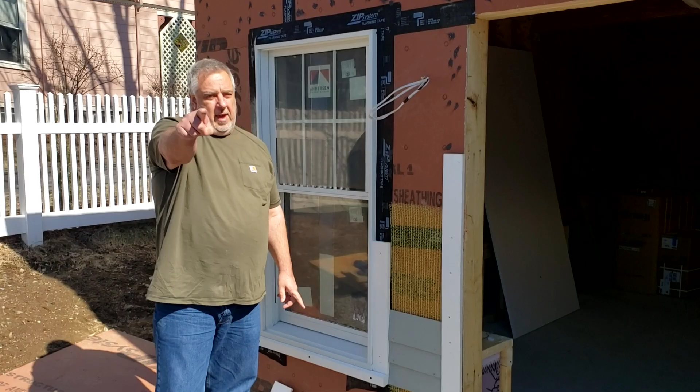We have Modern Renovations. We're doing a small garage and home gym here. With COVID, these spaces have become somewhat the norm for people, and we're doing this home gym here.

But today we're going to concentrate on this beautiful mock-up that Victor and his guys did, and we're going to talk about the rainscreen. First of all, a mock-up does a couple things. One, it shows the guys on the crew what we expect. It allows me to see what kind of work they're doing and make sure we're getting the design intent right.

But three, a lot of people don't ever use it as a tool. You bring the homeowners out here and explain to them what you're doing in the mock-up and why the building science is working. That elevates your position as a builder, that you're using science to the benefit of their project.

So you can see here, we have the Andersen windows. It's been installed, flashed. The zip wall has been properly taped. Notice that all the laps are proper laps. It's been rolled thoroughly, it even says roll the tape on there. And then we have our 1x casing, our historic sill, which is a 6/4 sill.

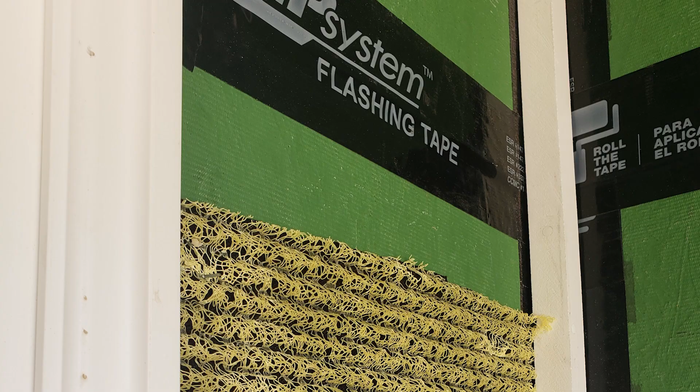We have Benjamin Obdyke's Home Slicker, which is probably a little more than a quarter of an inch. And then we have our door casing here. And again, it's a mock-up, so this will get cleaned up when we actually put the door in. And then we have our traditional lap siding happening here.

But the purpose of the rainscreen is twofold: it's to drain water, but it's also to help the wall dry. And when we get back to the studio, we're going to talk about that in depth.

But before we head over there, I just want to do a quick mock-up. I got some tools of my own.

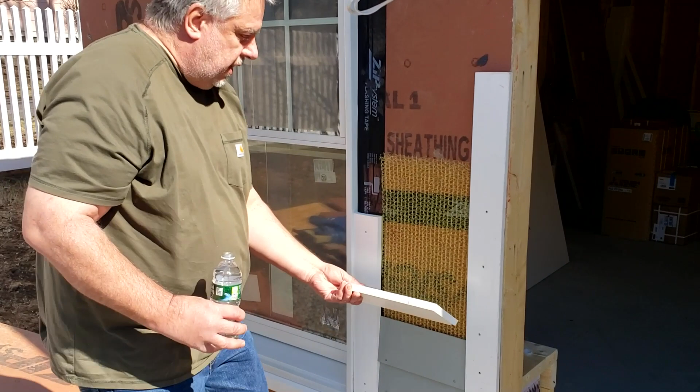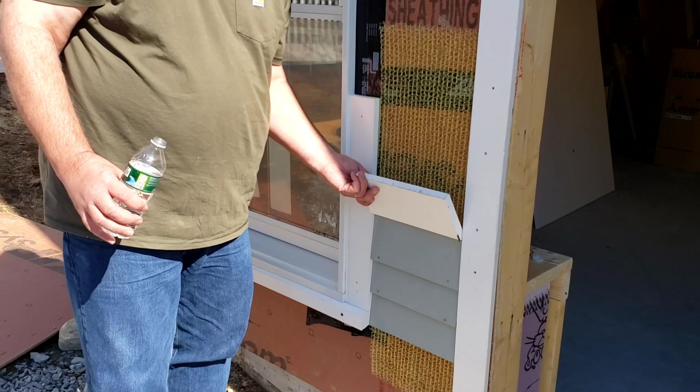So you can see here, this is just a basic funnel, but when I pour the water in, you can see at the bottom of the wall how that drains out. Really nice. So we have that draining capability happening at our wall system, and then we have that drying capacity too.

So let's head back to the studio. We'll pull up the drawing and we'll talk a little bit more about rainscreens.

Hey everybody, hopefully you enjoyed that little trip out to the job site. Victor and his crew doing a hell of a job out there, but it's always great to see rainscreens in action. As an architect, my whole life revolves around planning, and it's great to see things being executed with that mock-up and seeing things work actually as they're planned.

So anyways, got Big Red, I broke out the wall section from that project, and let's have a little bit of chat about the benefits of a rainscreen. So let's have at it.

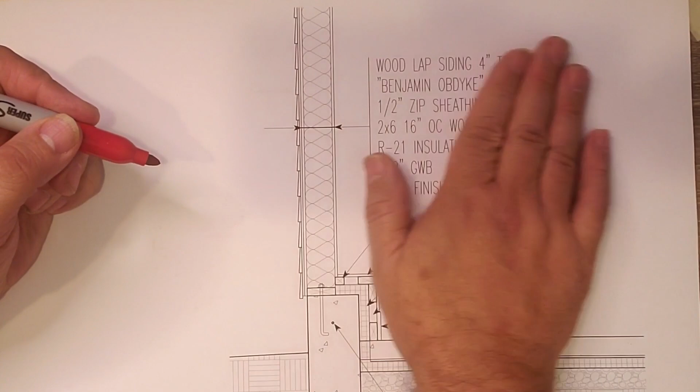All right, so there is the detail from that wall. Let's talk a little bit about rainscreens. So to give you some orientation, there is...

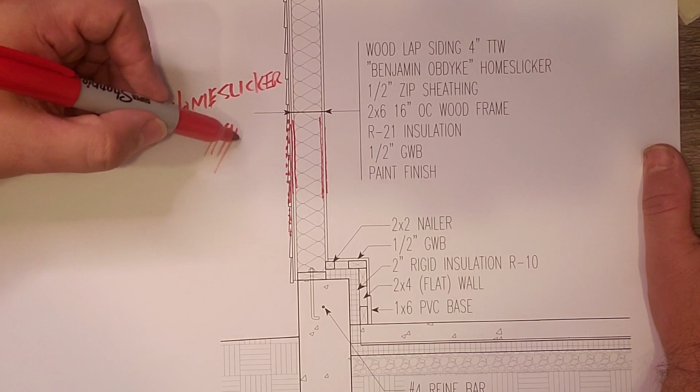...interior gypsum board that'll go on that wall. This is that exterior zip sheathing. Then we have the Benjamin Obdyke, it's called Home Slicker. It's nothing more than this plastic yellow mesh that's probably on the order of a quarter inch in thickness there. And then of course we have wood lap siding on there.

So let's talk about rainscreens. Write some of this stuff out, and I know most of you know how to spell it, but: rainscreen.

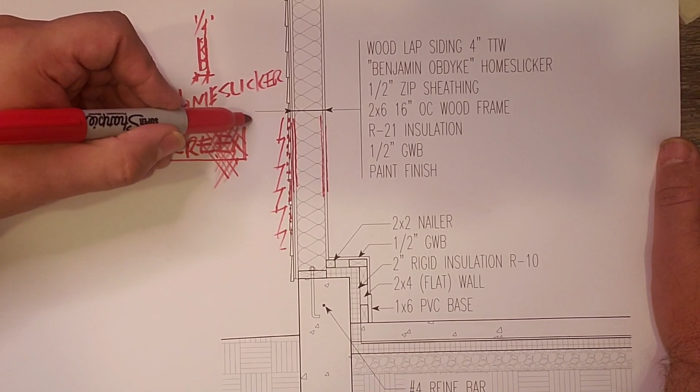In my time, I've heard them called pressure equalized rainscreens, pressure screen, all kinds of simple names. But for us, we're just going to keep it simple and call it a rainscreen.

So what does a rainscreen do? Well, it basically has two functions. Now, most people concentrate on the draining of a rainscreen, so that's job number one.

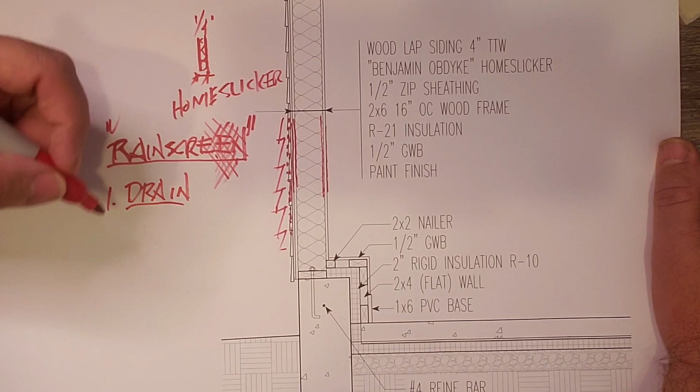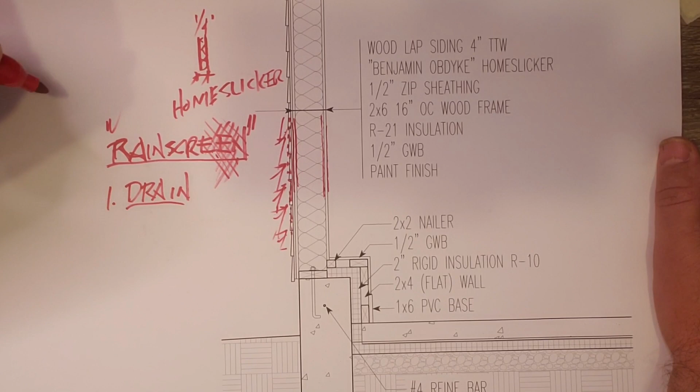And you've heard me talk about water before. So if water migrates into the system here through the joints, lap joints, gets blown in, all that good stuff, well, and it will, don't think it won't.

It will. That water needs to go, because remember, we call it water management, right? It's not water barrier, it's water management. So we have to manage the water.

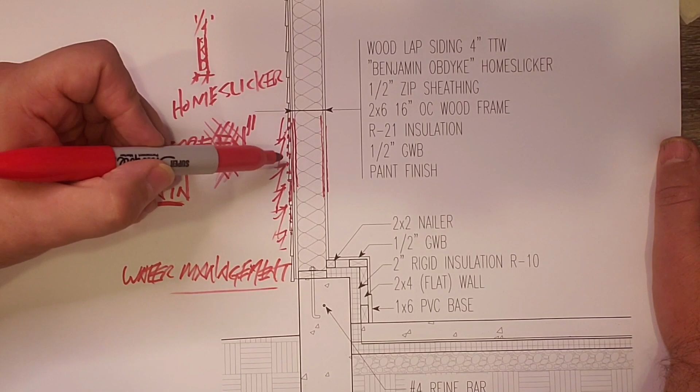So the first thing we have to do is drain that water. So any water that gets into that system has the ability to migrate via gravity, which is always a good force. Why? Because gravity's free. It's non-mechanical.

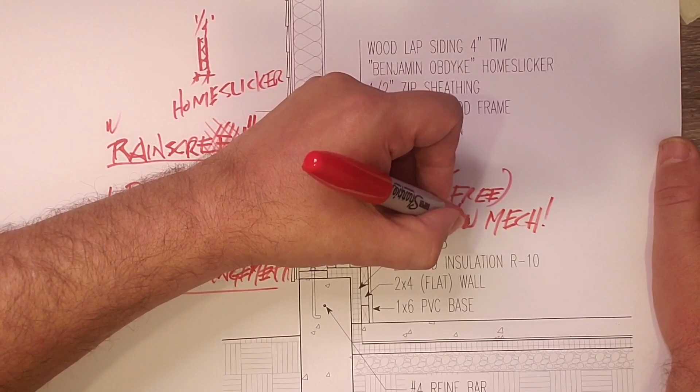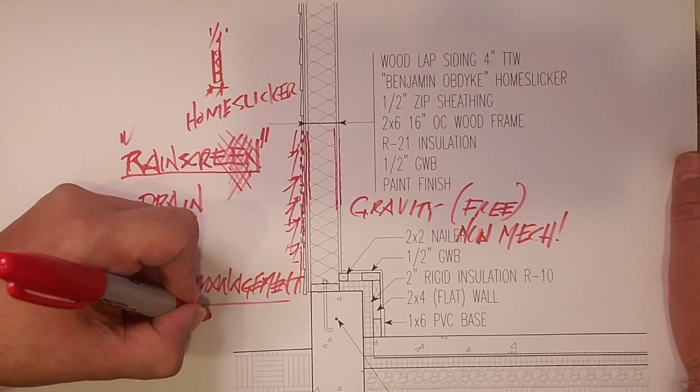Right? It just exists, so that's good. We have things in our favor. So drain it. And because it's water management, you've heard me say down and out.

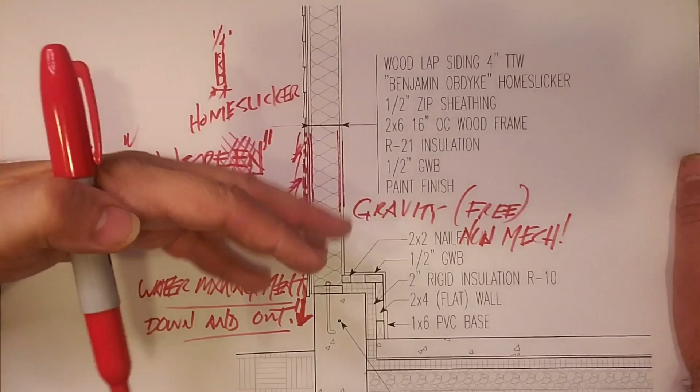And that's what we're doing. Any moisture or water that gets into the system will drain down and out. Keep in mind, you're not getting gallons and gallons of water back there, but you could potentially accumulate enough in certain areas where it could have a problem.

So the way we get rid of problems is we drain them down and out. Now, some of that moisture that gets into that system is going to migrate into the system, and it's going to get taken up by the zip and the clapboard, the lap siding, all of that stuff.

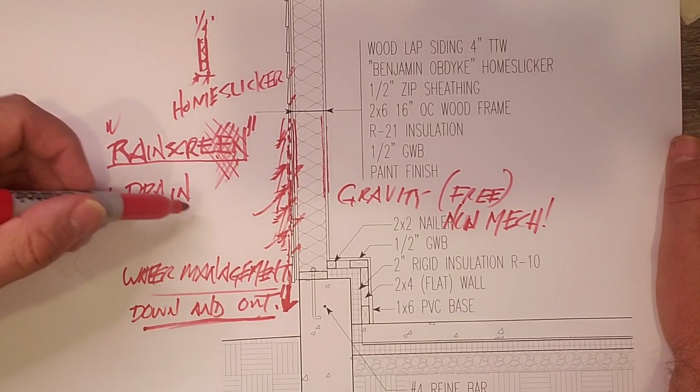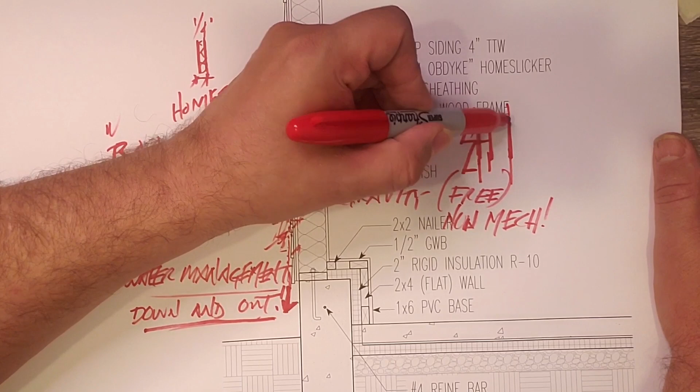So if we blow that up a little, let's see here. All right, so you have the stud wall, and then we have a space here. That's our Benjamin Obdyke. And then we have our lap siding. See, moisture gets in there. We want to drain it.

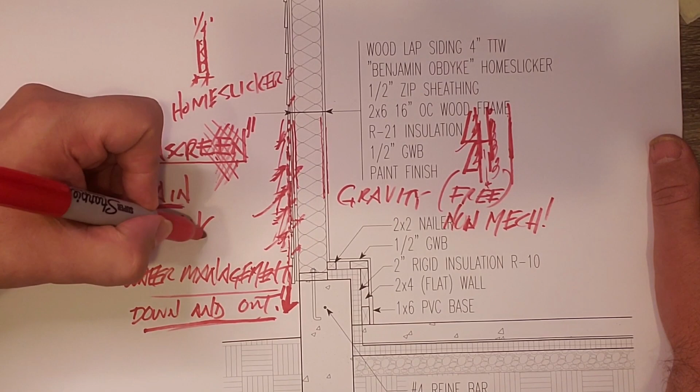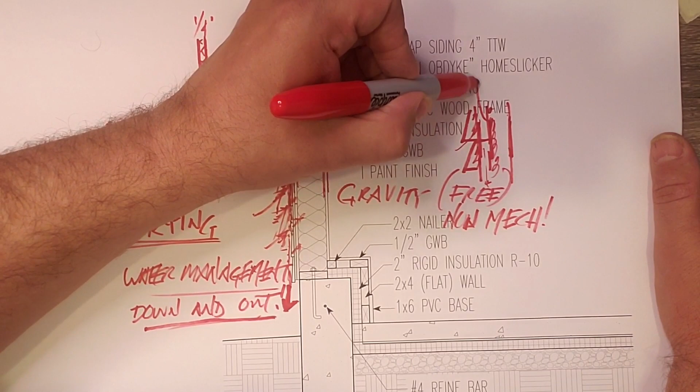But if moisture gets in there and gets taken up into the siding or into the sheathing, then the second thing we're asking the rain screen to do is to provide drying. Right? So if we get a little bit of ventilated air in there, then what we do is we whisk away and give that moisture a place to go.

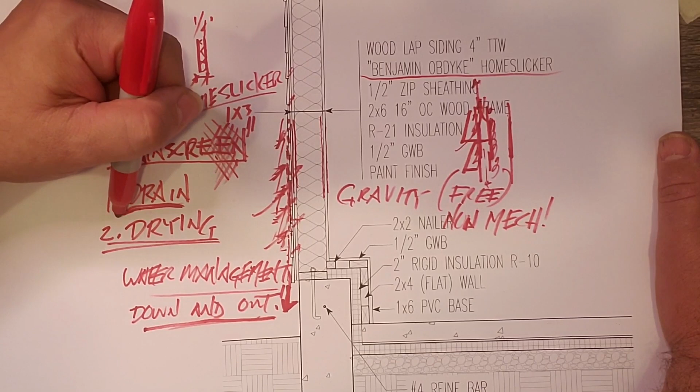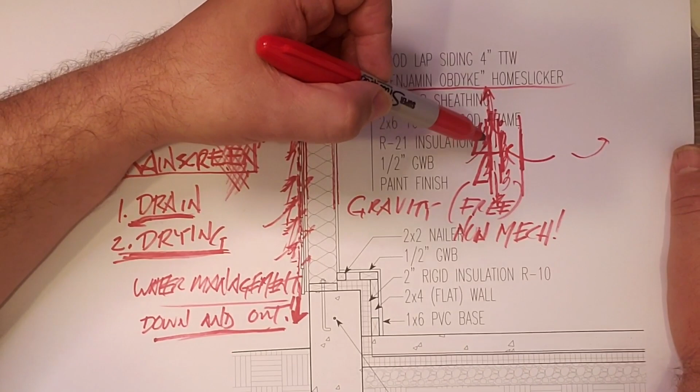Now, here we're using the Benjamin Obdyke home slicker, but a lot of times you see me use 1x3s. So there's all kinds of ways to create a drain and drying pathway. But what's important to understand is that it's not only about draining the water out, it's about drying those materials out. So you get to dry that wall out from both directions, but you also get to dry the back side of the wood lap siding. Now, why do you care about that?

Well, if I draw a piece of lap siding here, and then the next piece is there. So I paint it and I put a coating on there. Well, moisture is going to get in there. It will. And then the sun is going to come out. When the sun comes out, that moisture is going to want to migrate out of the system. And if I give it a place to dry, then I can severely reduce the amount of moisture that's back there. But if I don't give it a place to dry, I can potentially accumulate some moisture back there.

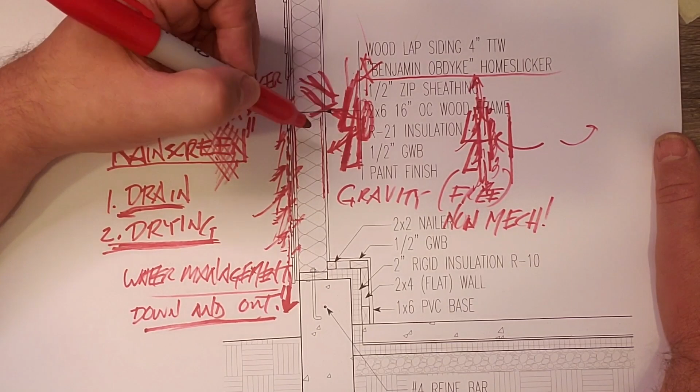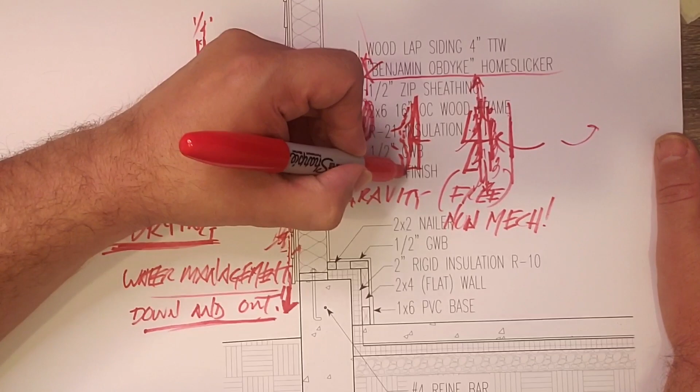Sun comes out, that moisture wants to dry. Well, what's the first thing that it gets challenged by? Paint film, right? And so what happens? Well, in year 1, 2 of the paint job, the paint wins the battle. Year 3, it starts to weaken. By year 4, that clapboard face starts to develop a little blister, because that moisture is starting to win. And then that develops a bigger blister, and a bigger one, until that blister pops. And then the moisture is released. And that is simple paint peeling.

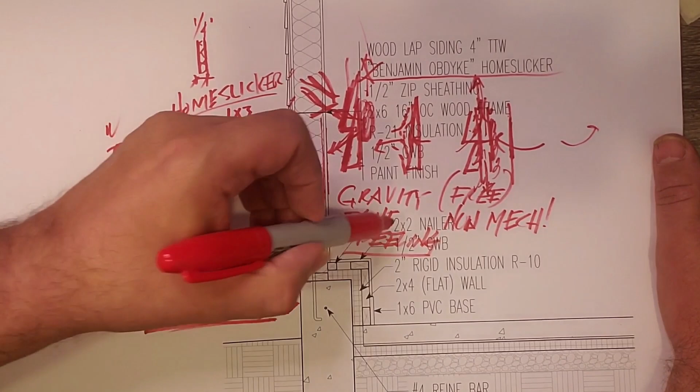Right? So guess what? A rain screen, because of its drying, helps fight paint peeling also, because it gives moisture a place to go via drying. So due to our water management, we can take what could potentially be a 7-year paint job and double or triple its lifespan.

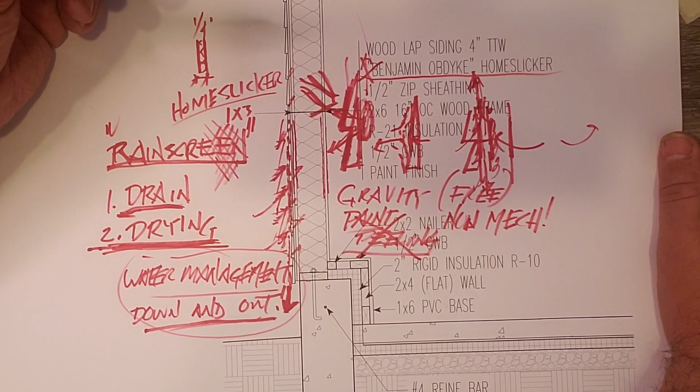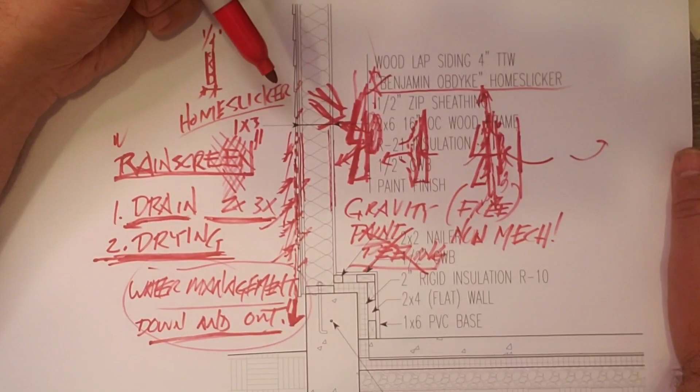Right? So the rain screen here, a lot of people want to look at it as a cost. Well, it's really not a cost, it's an investment. And I know some of you might think, hey, this is a push, Steve, but the house that I'm in right now, I have a vented rain screen on the back. It's lap siding, it's painted. We're probably in our 11th year, and the paint looks brand new.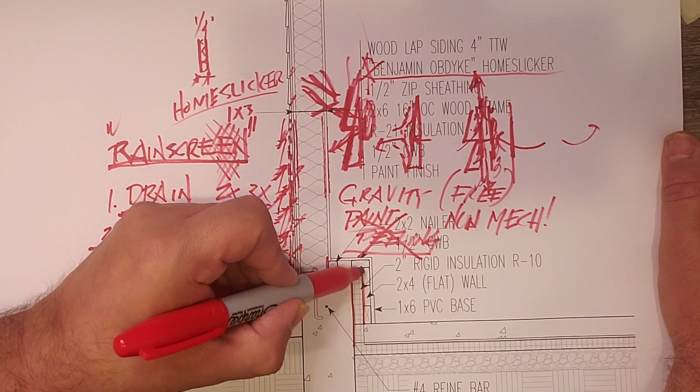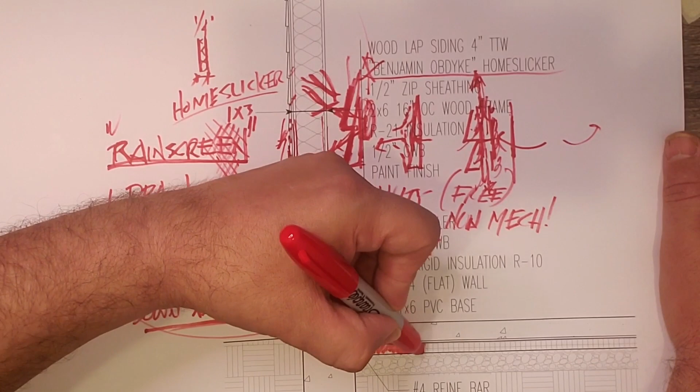So it works. Anyways, hey, take note of the detail here. So we have our insulation coming down. Look at that, beautiful. So we wrap that curb with rigid. We had rigid at the edge of the slab, and then we had rigid underneath the slab. So it's a fully conditioned space, and guess what? We have continuity of our insulation.

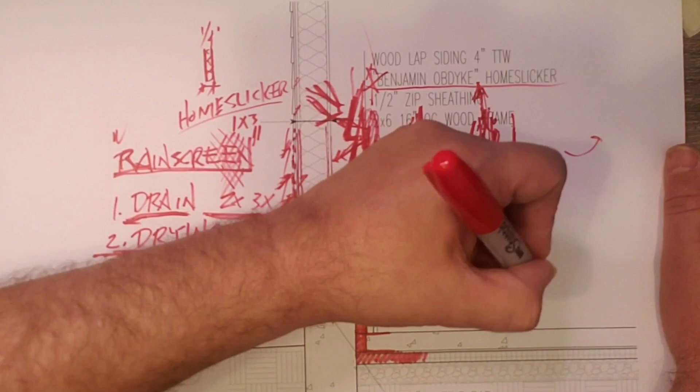So, little byproduct of the sketch there. Anyways, hopefully you enjoyed that. All right, it's another one in the books. Hopefully that little run with Big Red talking about vented rain screens helps out a little to understand them a little bit better. So hopefully you enjoyed that.